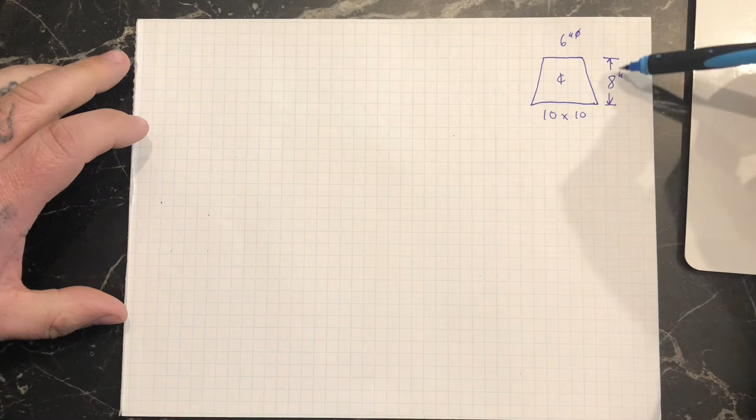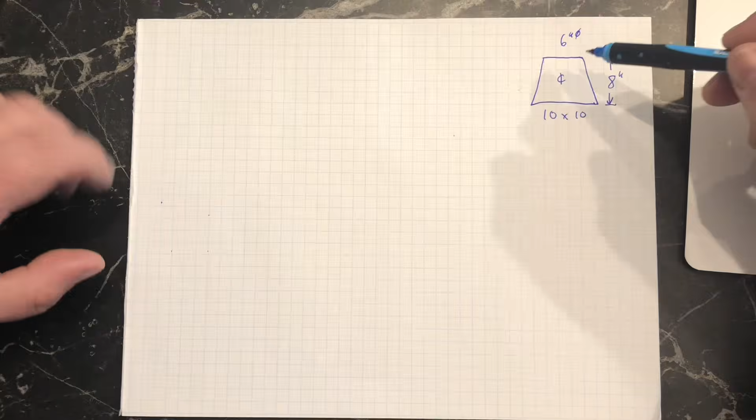So I have a square to round here that's going to be 6-inch round on top, 8 inches tall, and then it's a 10 by 10 square bottom. It's on center both ways. So the very first step you need to do is make a plan view drawing of this. So I'm just going to start off by drawing a plan view in this corner.

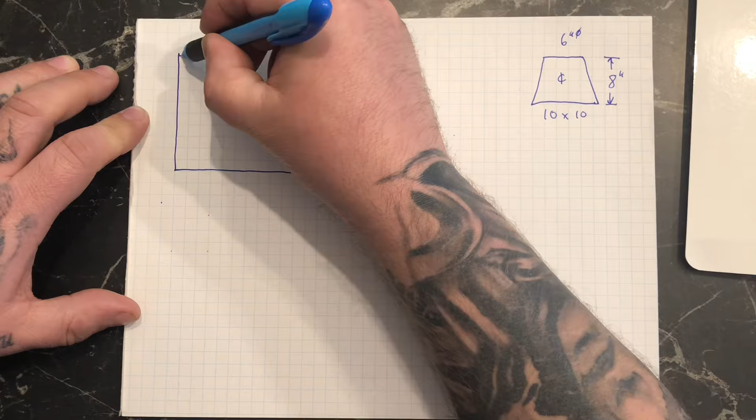So 1, 2, 3, 4, 5, 6, 10. So it's going to be freehand, but I got grid paper here, so this should help me keep it pretty straight and easy to see. All right, and then there's our center.

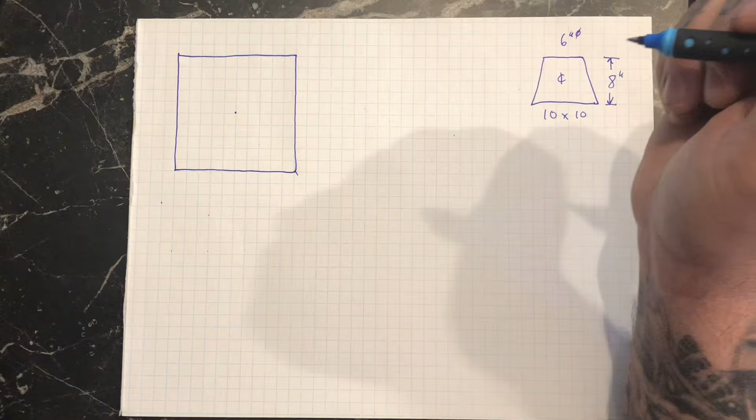Okay, so now I'm going to use a compass here to make the 6-inch round part. So I've already got it preset. Hopefully this shows up okay. I'm doing a full plan view here just so you guys see what it would look like from the top of this fitting. Okay, and then using the radius that I got to draw that circle, if I go to the center points of the circle, I can use that same radius to divide it into equal spaces all the way around.

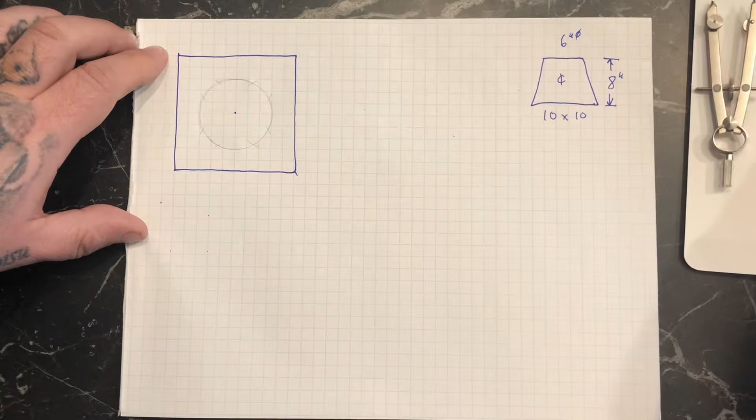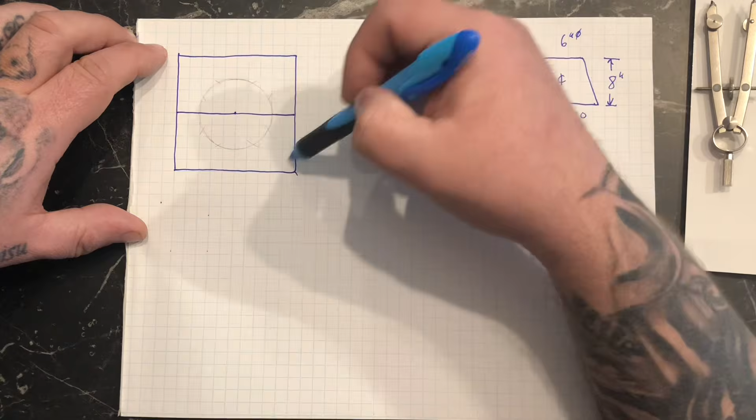I'm just gonna split this fitting in half because laying out a transition like this, you want to have 2 half patterns. I only need 1/4 of it to actually lay it out because this corner, this corner, this corner, and this corner are all exactly the same. But for the ease of this layout, I'm going to show you the full half pattern here. So I'm just going to darken up these points so they're easier to see.

So each one of these points now gets drawn back to the corner. So from this corner here, I'm going to go right to the center, and then to this division, and then all the way to the center here. And then I'm going to repeat that in this corner. Okay, now you can see this corner and this corner are exactly the same. I'm just going to darken up the circle. So there we have a half pattern in the plan view.

So the next thing I'm going to do is label it. I'm going to do the square parts with letters. So I'm going to go A, B, C, D, and my circle part I'm going to label with numbers. So we got 1, 2, 3, 4, 5, 6, 7. All right, so that's step number 1, making a plan view that's labeled and all to scale.

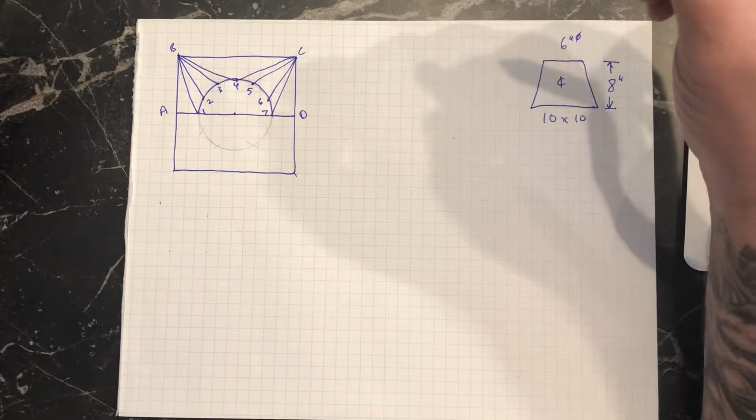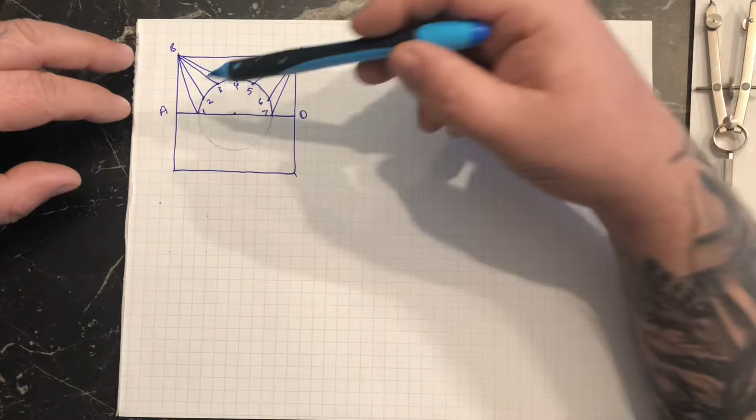Now to lay out this pattern, it's basically triangulation. The definition of it is having 2 known points to find a 3rd unknown point. So in this view here, I can have a distance from this one view. So I have a known length here, but I need a known length in another view as well, so I can find the 3rd length.

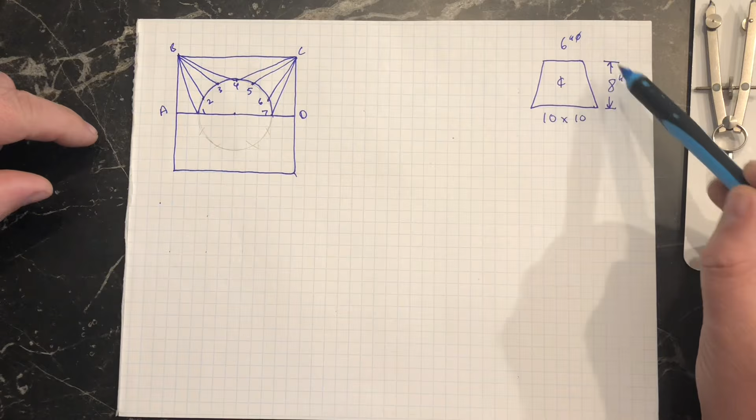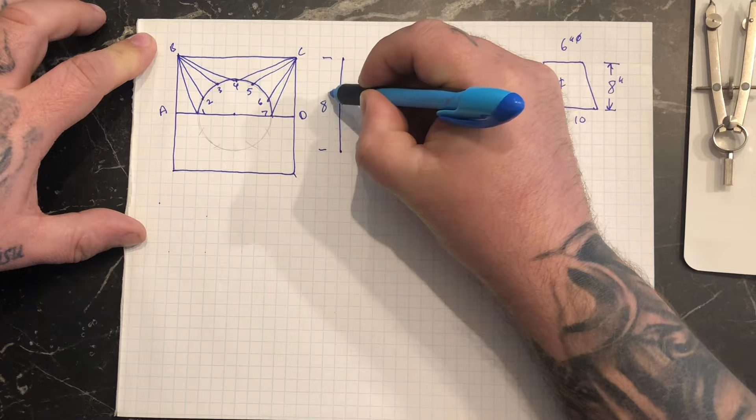So if this square to round is 8 inches tall, I need to represent that in a true length triangle. So if I just make a true length triangle here that's 8 inches tall, so we got 1, 2, 3, 4, 5, 6, 7, 8. So it's 8 inches tall from here to here. And then I'm going to just do an arbitrary length out this way. So this is where I'm going to be plotting measurements from, so I can actually make a hypotenuse, which is going to give me that third length, or the true length.

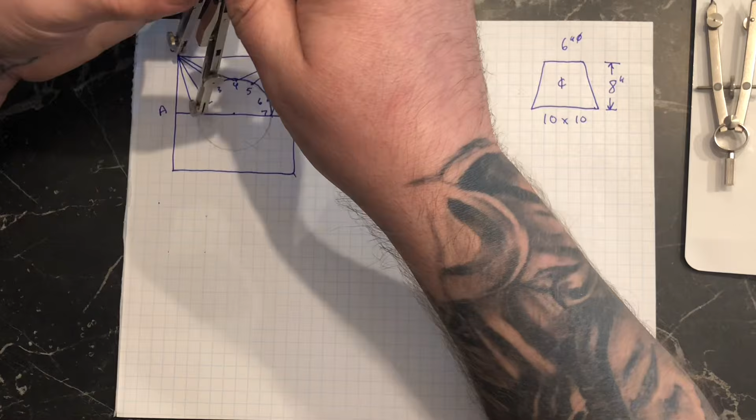So if I take these measurements here, so from this corner to the number 1, if I measure that, and then transfer it over to the baseline here, starting at the bottom and moving it there, then that hypotenuse becomes the true length for this B1 line.

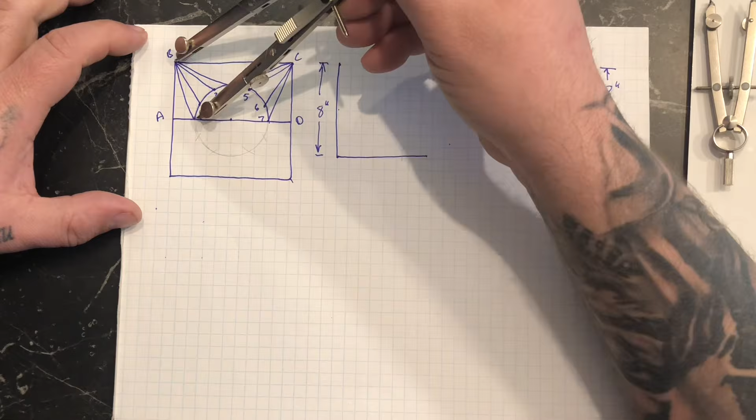So again, take a measurement of B1, put it on the baseline here, and then from the top of that 8 inches down to the baseline, that's going to be a true length. Now with a square to round on center, there should be a lot of lengths that actually end up being the same.

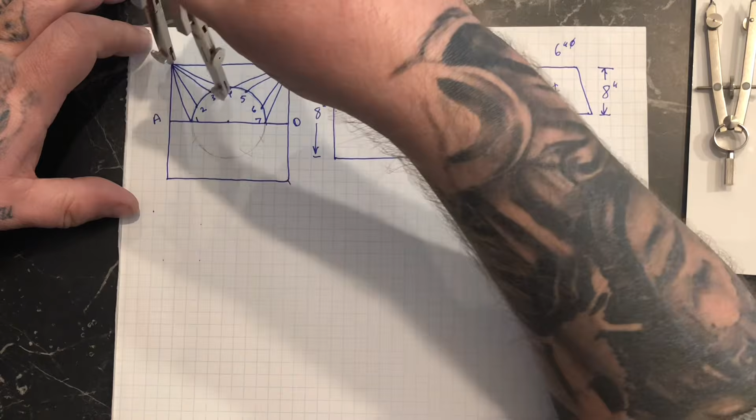Because I freehand, this might not translate super well, but B1 and B4 are going to be the same, which means C4 and C7 are also the same. So I can actually label that on here. So this first line I did is going to be B1, B4, C4, and C7.

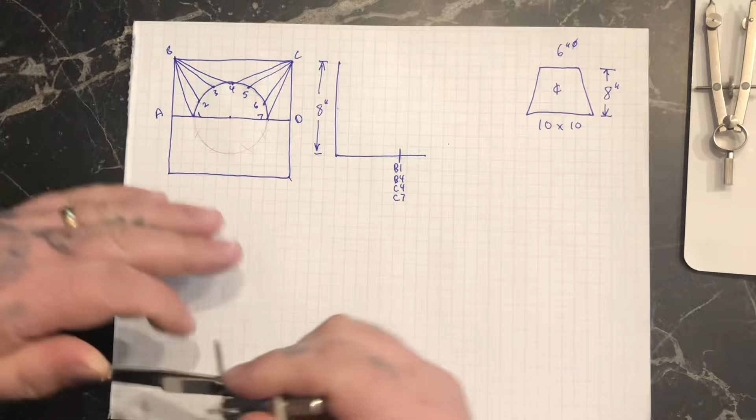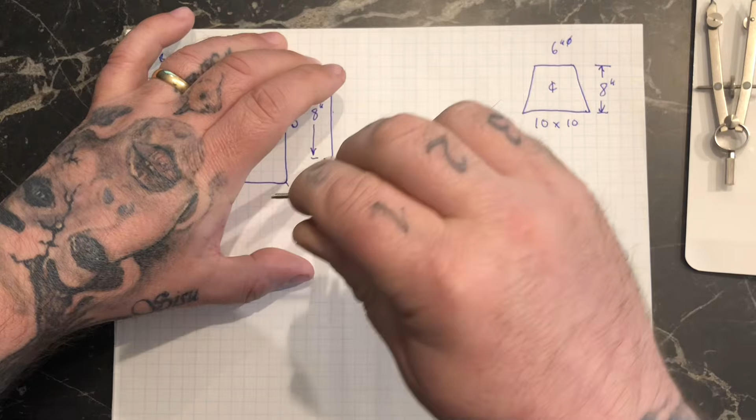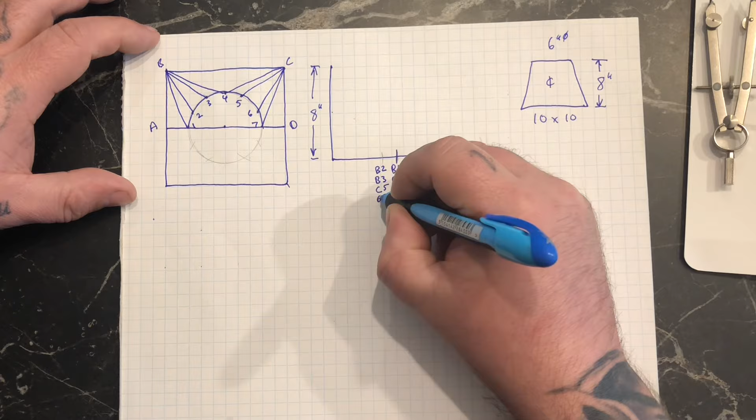Now the next one I'm going to transfer over is from the corner here on B to 2, and I'm going to put that on the baseline here. And again, because it's on center, B2, B3, C5 and C6 are all the same. So when I transfer them over on that true length triangle, they're all going to be the same length. So B2, B3, C5, C6. Those are all the same at this point.

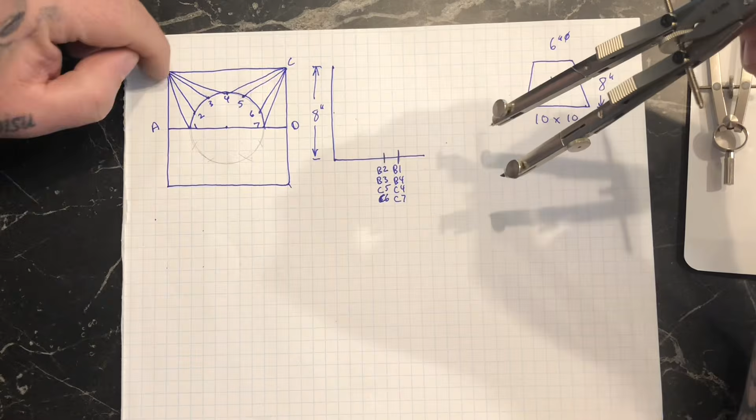Now there's 2 more measurements I need to put on there, and that's going to be my A to 1 and D to 7, because in this view they're not true lengths either. In the plan view here, the only thing that is a true length is A to B, B to C, and C to D, because they're parallel to my plane of view. So I need to plot these out so I can get a hypotenuse to make a true length.

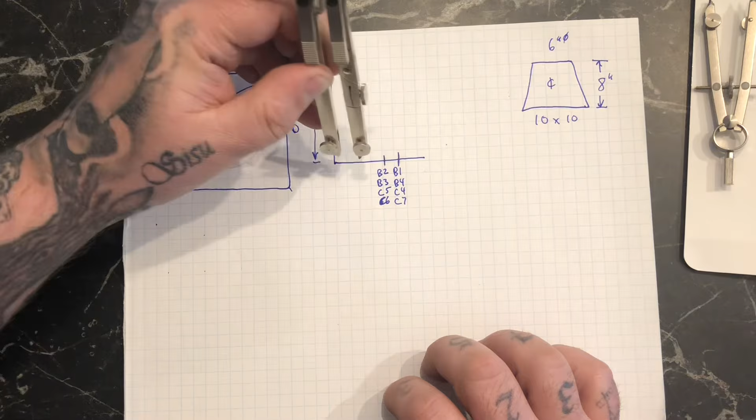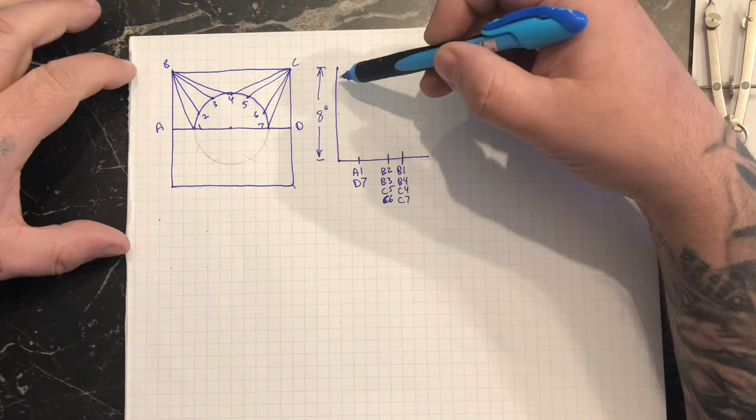So if I take that measurement there, A1 and D7 are going to be the same. So plot them on the baseline here. A1 and D7. All right, now I have all my plan view lengths. And then if I have my elevation view height here, I can get a hypotenuse for each one of these and make it true length.

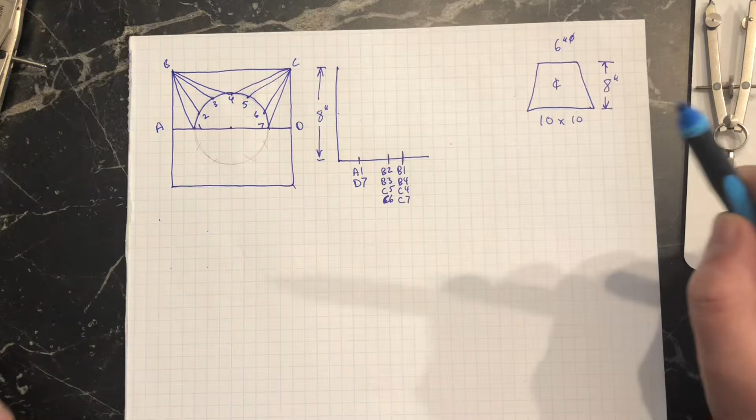So the way to actually lay the pattern out as a half pattern, I'm going to start with the middle of the pattern, which is right here. B, C to 4. That's the very first triangle I'm going to lay out. And that's basically what triangulation is: finding triangles and then drawing them in a true length form. So I'm just going to start with the BC. And imagine if I was standing in the middle looking this direction, for it to be an inside pattern, B would be on my left, C would be on my right, just the way I'm looking at it now.

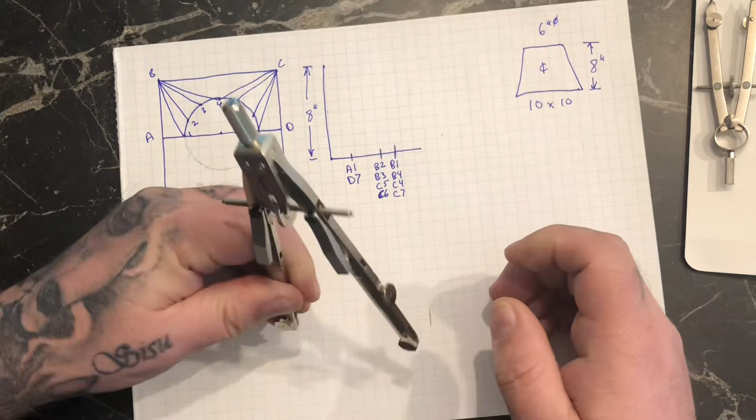So I start taking a measurement here of BC, because it's a true length, and I'm just going to plot it right here on the bottom, B to C. So this point to this point, there's my B, here's my C. And I'm going to connect those with a line.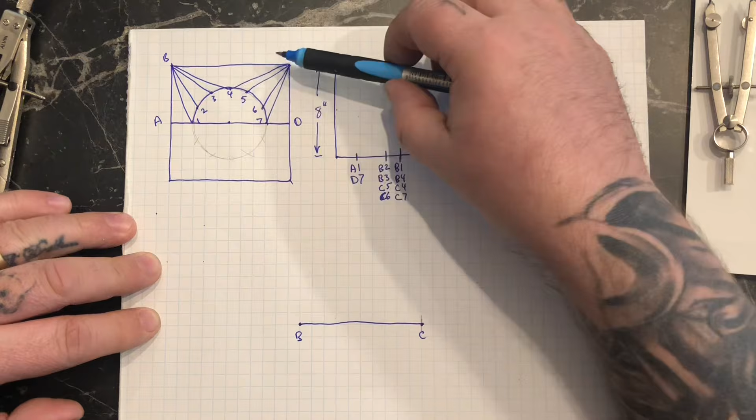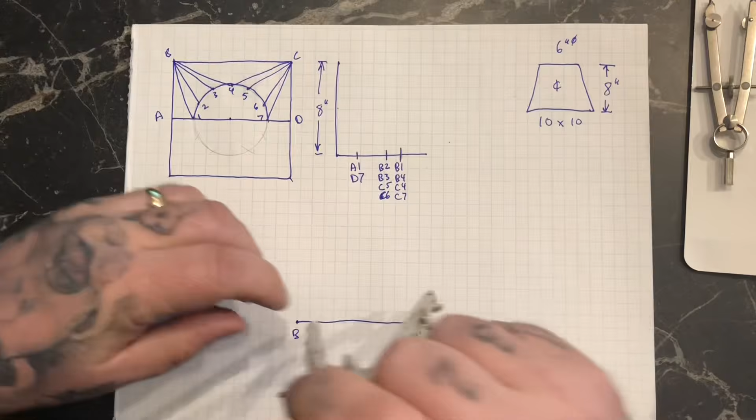Now the next point here is 4, right, to close this triangle in. So B4 and C4, and if you remember when I first plotted them out, they're both in this column here, the same length. So if I go from the top of my true length triangle now and take this measurement right here, that hypotenuse of that triangle is a true length. So now I'm going to go from my B to number 4, and then my C to number 4.

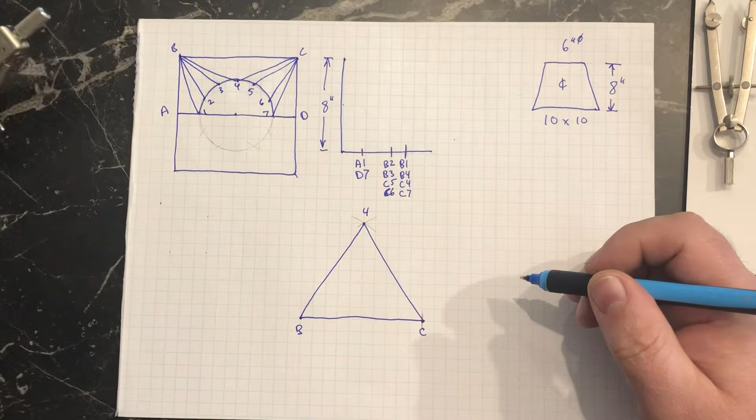So now this point here becomes number 4. And if I draw lines to connect them, there's that triangle in true length form. This is actually what it's going to be in reality. So this triangle from this view is that triangle right there.

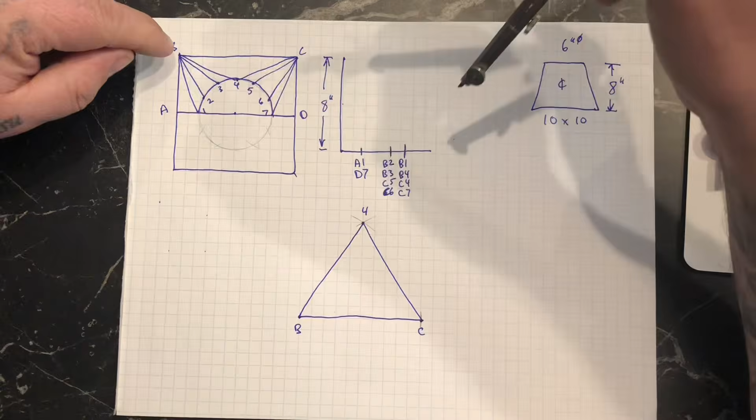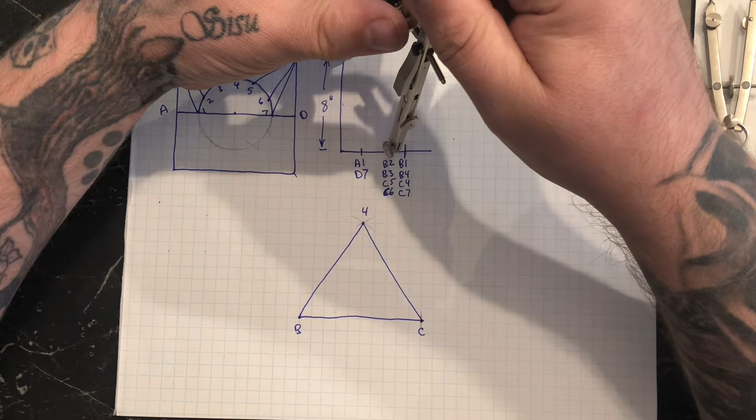So now I'm going to just start on my B side here. Actually, what I do on this side I'm also going to copy on this side because the lengths are the same. So I'm going to take my B3 and my C5, and those are both from this next column here. So from the top, take this measurement. So B5 and C, oh sorry, that was B3 and C5.

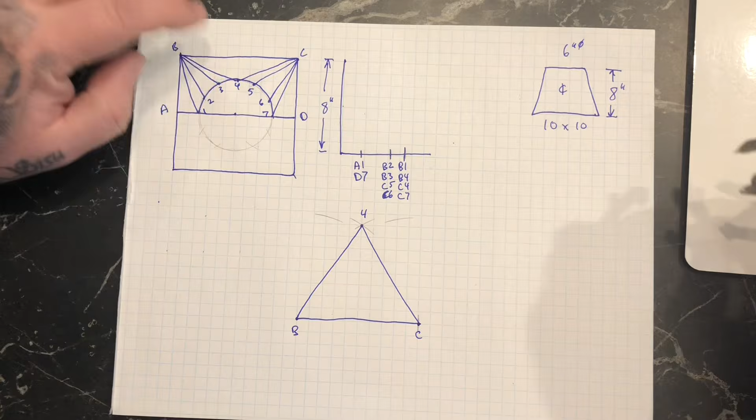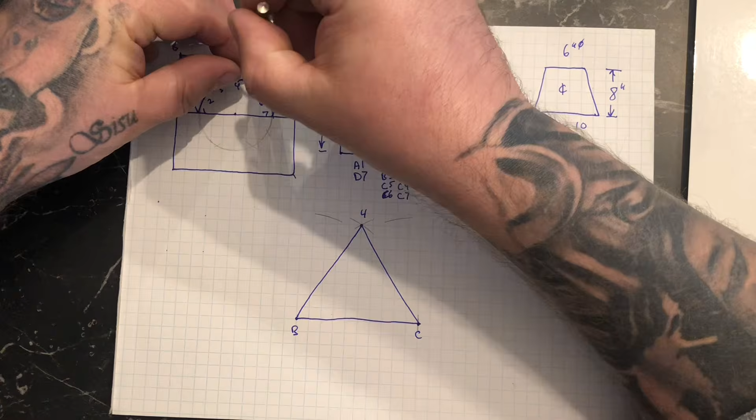Right? Now, the next thing I need to do is go from 4 to 3 and from 4 to 5. So I'm just going to take a chord length here from this plan view. Make sure that they're somewhat even. So now this is going 4 to 3 and 4 to 5. I didn't quite swing those long enough.

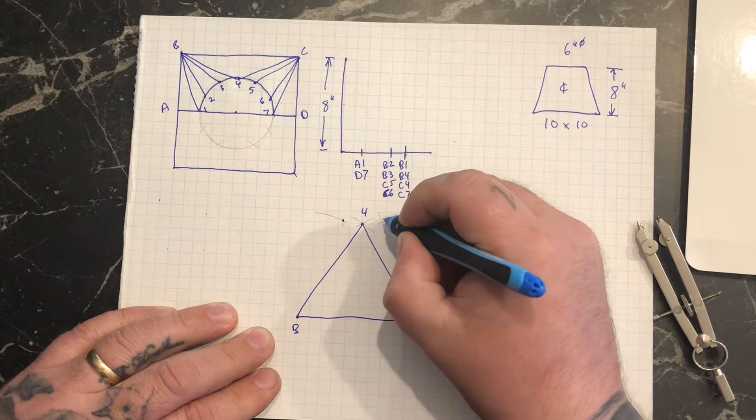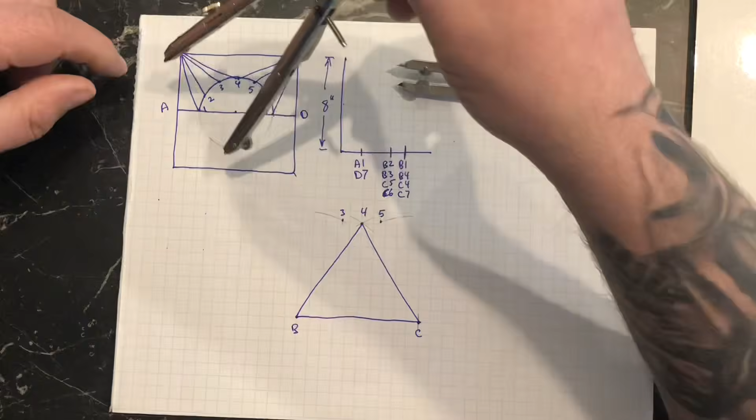That point there and that point there. So we have 3 and 5. If you note, I've actually got 2 compasses set up here. One that's short, and I'm just gonna leave this one for my chord lengths on this plan view just preset, so all I have to do is step them off now. I don't have to keep adjusting it. And my larger one here where I can transfer these measurements pretty easily.

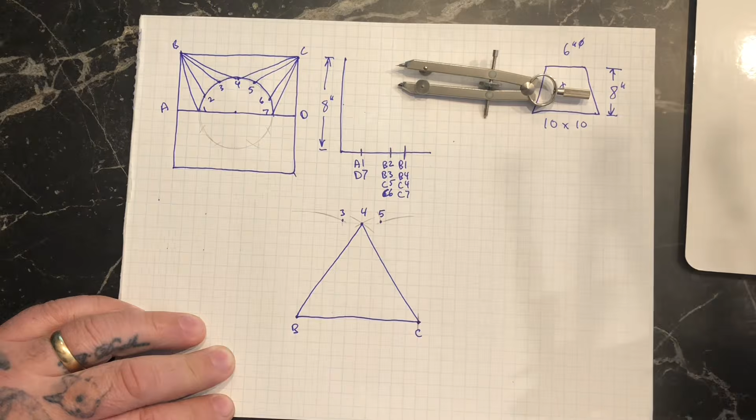Now, if you remember, my next ones here now are gonna be B to 2 and C to 6. And if you remember, 3, 5, 2, and 6 are all the same length, so I don't really need to change anything here. They're still coming from this point here. So now, that arc I've drawn, if I just extend it out a little bit, it should be enough to cover that. So now I'm gonna go from 3 to 2 and then from 5 to 6. So first from 3 to 2 and then from 5 to 6. 6, 2.

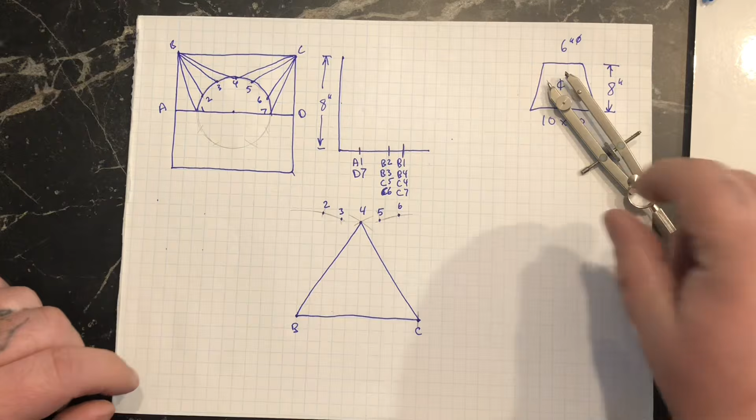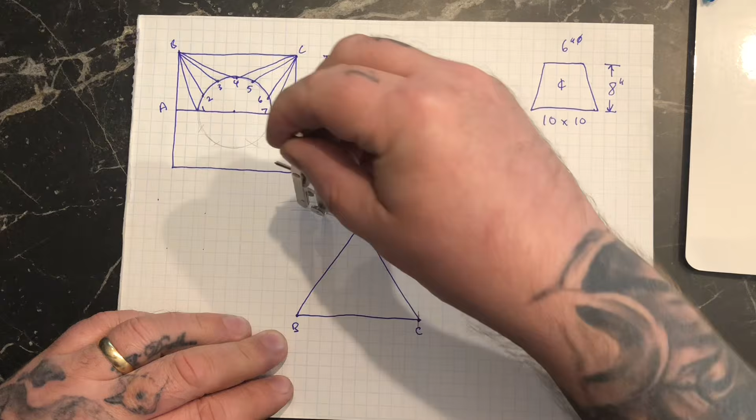And now finally I need the B to 1 and C to 7. So that's again going back to this longer length here. B1 and C7 are in the very last column. So I'm going to take that hypotenuse there. And B1, C7. I use my small compass because it's already got those preset. 1 and C7.

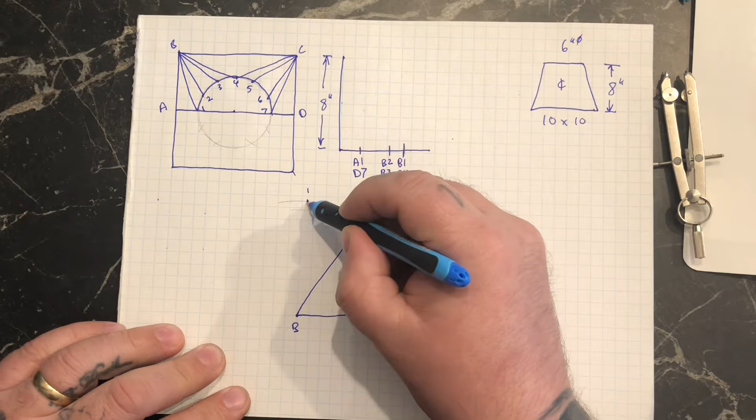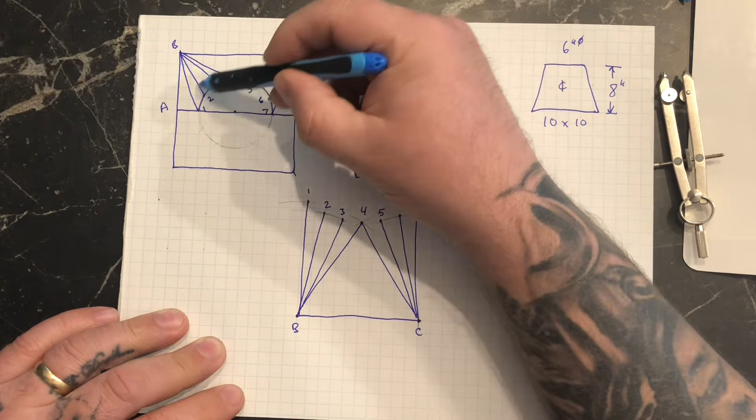Number 1, 7. So now all the numbers that are in the round part are all done here. So now I still need to finish these wings. So I'm just gonna connect these lines so you guys can see what we've done so far. Right, so 1, 2, 3, 4, 1, 2, 3, 4. We have all the same lines matched in here. I can actually connect my round part.

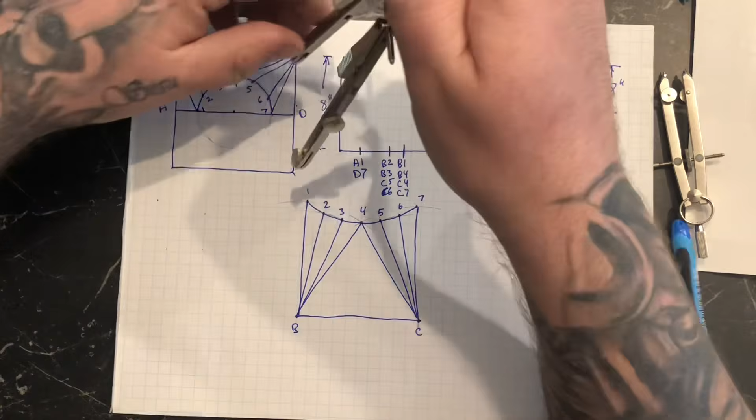But now I need to go from C to D and B to A. And if you remember, these are true lengths because they're perpendicular to my plane of view. So I just need to take the measurement here, C to D. So C to D, remember I'm going from C though, so it's at the bottom here, C to D. And B to A is also the same measurement. So I'm gonna go B to A.

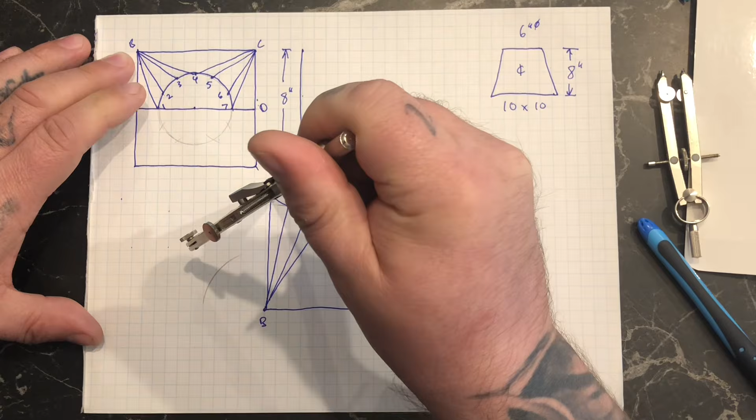And now I need to go from 1 down to A, and then also 7 down to D. So, because it's going from 7 to D, 1 to A. So those are on the last part here on my true length triangle, the last 2 measurements. So if I take this hypotenuse, and I'm going to go from 7 to D, and 1 to A, D, A, I have completed this fitting. Well, the half pattern anyway.

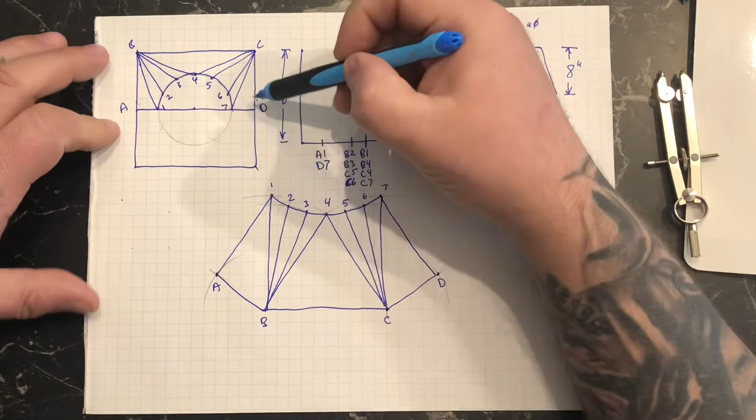So 1, 2, 3 big triangles, and then 1, 2, 3, 4, 5, 6 little triangles. And that is a completed half pattern. The way to double check to make sure it's right, this should be a 90-degree corner here and here. And this half of the pattern is going to look exactly the same as this. So all I'd need to do is flip this over and trace it, and then I have 2 half patterns.

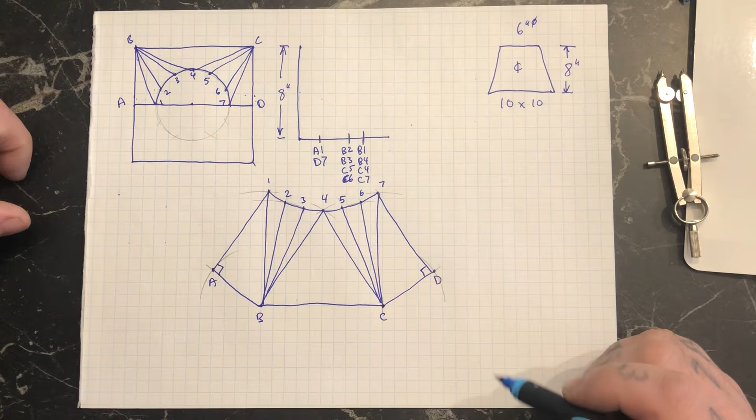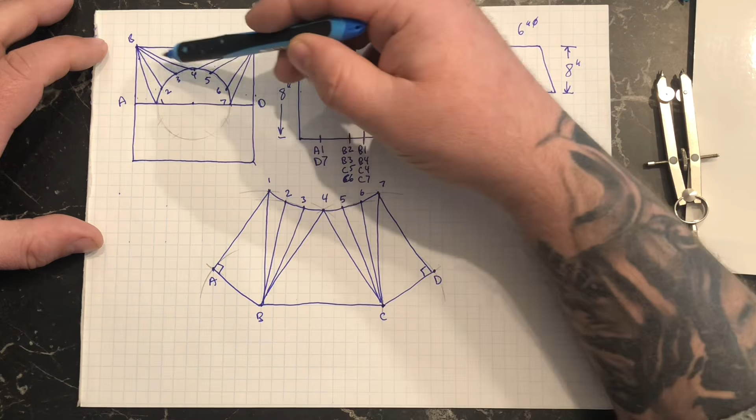Now, if this was a square to round that was off center in any way, I would definitely have to do at least a half pattern. And if it's off center in both ways, like if the circle was down here, I would have to draw a full plan view, and there'd be a lot more numbering and transferring. But it's the exact same process, just taking measurements from this view, putting them on a true length triangle, and then laying it out the way I've showed you. And that's basically it.